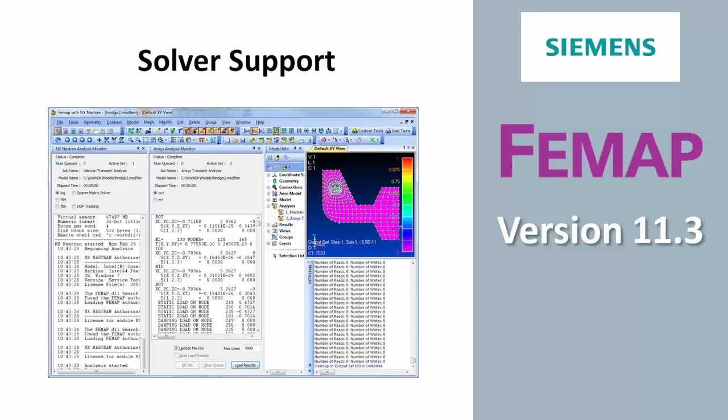For ABAQUS, we've done a lot of work over the last couple of years with high-speed attachment to results from Nastran OP2s, XDBs, comma separated, and our own binary results file. But now we also do the ABAQUS ODB file. And we're using the toolkit provided by ABAQUS, which is actually pretty nice. First of all, it worked. It was easy to incorporate, but it also does kind of automatic versioning.

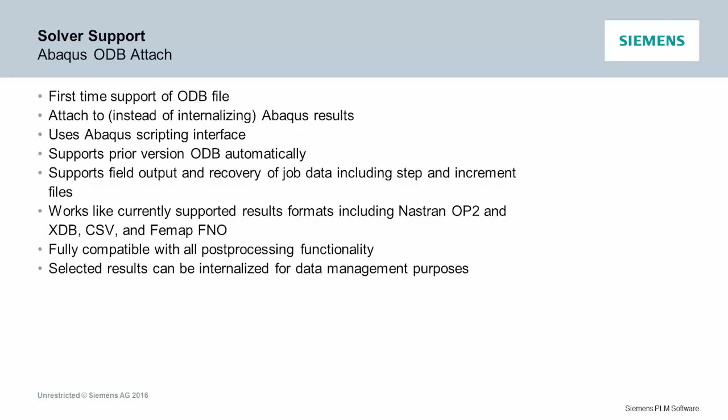If you've got an old ABAQUS ODB file, their tool, when you go to attach and use their libraries to access it, automatically knows what version it is. It gives you back the right results. So just like using OP2s, XDBs, and attaching, you now just pick an ABAQUS ODB file and we attach to it, pull everything out of there when it's needed, and then if you want to internalize it, same tool. You can say bring it in the FEMAP database permanently if you want to.

Nastran, obviously, with Siemens and NX Nastran and all that, and even a lot of our customers still run MSC Nastran. People's processes are kind of built around Nastran and how they do it. So a customer came to us, and we have these studies now. If you read in your modal run or a transient run, everything goes inside of one study. That study used to get just a title, or just say modal or static study, or transient. It now can optionally get the file name that you read the results from. So if you're naming your file something that means something, you're going to see it as your study title, which is nice.

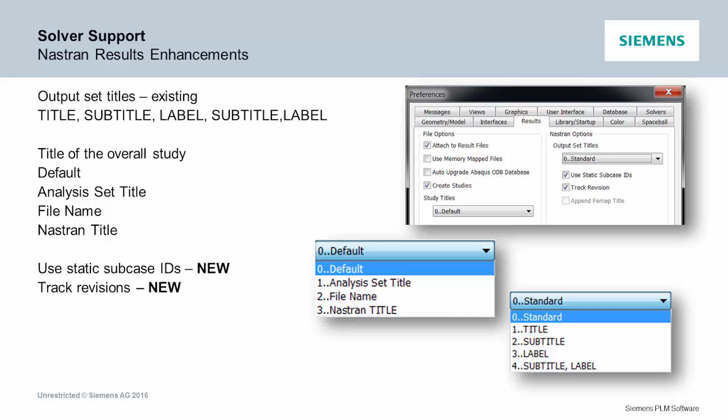We also had a customer whose subcase IDs in Nastran obviously meant something to them. Like case 301 was a 4G pull-up, and they want to know that it's 301. So FEMAP will now bring in that subcase ID and put it in as part of the title. So now you'll see case 301. You know where it came from. You know what it was. And there's also versioning, so if you read it in a second time, we will show you an R1 and R2 and R3 as you read them in, so you know what's going on.

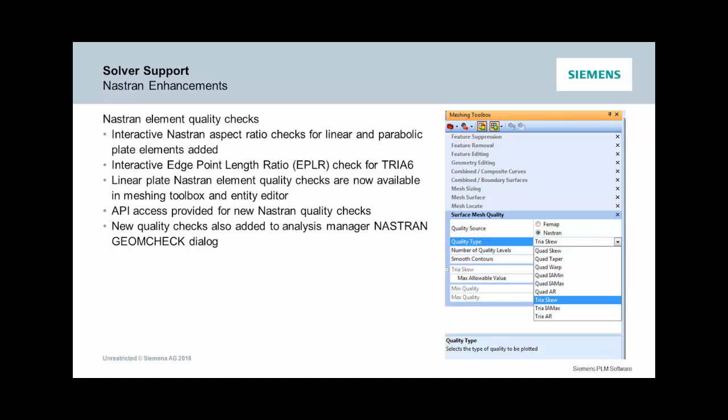Another thing here, for Nastran enhancements, we now handle, I think, all the quality checks that Nastran can do. We got the source code from the NX Nastran team, and we do the exact same quality checks. So if you want to match what gets spit out of Nastran, you can do that in FEMAP where you visualize it by a contour or criteria, or in our listings and data checking. You can use all the exact same Nastran element quality checks that Nastran uses.

Another small enhancement for our dynamics folks using Nastran, we now support all the FREQ cards. So FREQ, FREQ1, FREQ2, FREQ3, 4, and 5. And the real nice thing is they're actually across your model. So if you set up these frequency specifications and you create an analysis set, they all have checkboxes, and if you create another one, you can use the same ones in another analysis. And you can copy in between models if you set up a bunch of frequencies important to you. So if you're a frequency response or dynamics guy in Nastran, you should really appreciate using these.

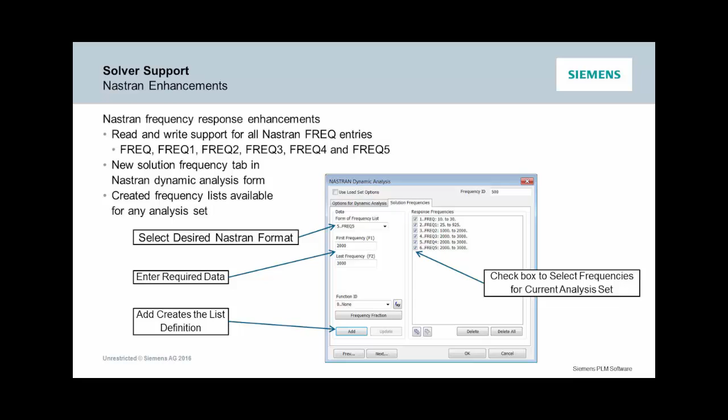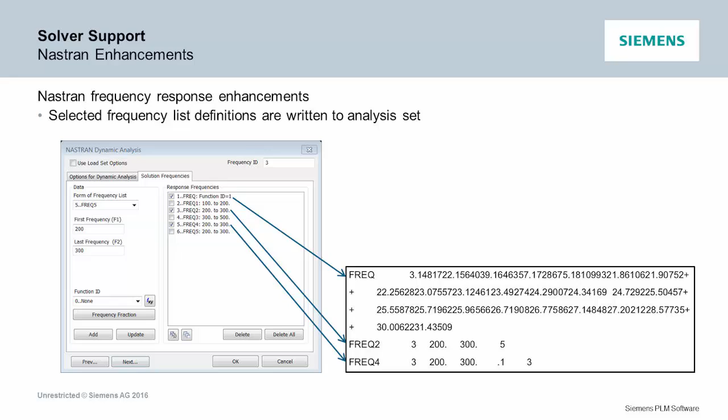Just to give an example, if you pick certain ones in the analysis setup, those are the ones that go out. And we read these just as well as write these, so it'll bring in all the different FREQ cards from your Nastran bulk data files.

For years, we followed the Nastran convention. If you want to do enforced displacements, you created it as a load, and then you had to go in the constraint set and actually constrain the same degree of freedom, because that's just the way Nastran worked. But we now support non-zero constraints as SPCs. So now you just need a constraint set, you can put the numbers on, and you can have enforced displacements on your model without having a load set. And again, read-write: if someone sends you an existing model that already had this in it, we read it in and support it now.

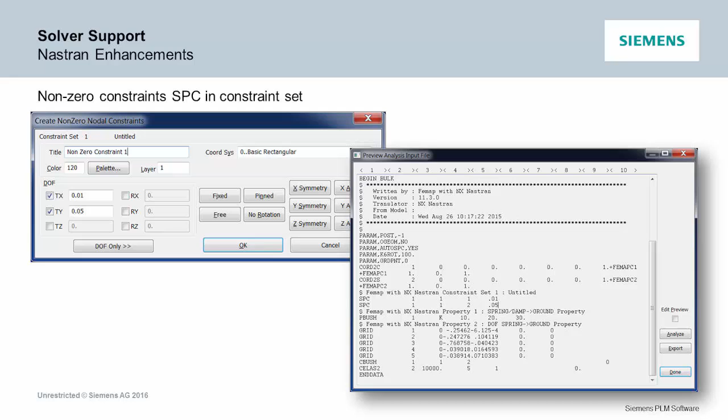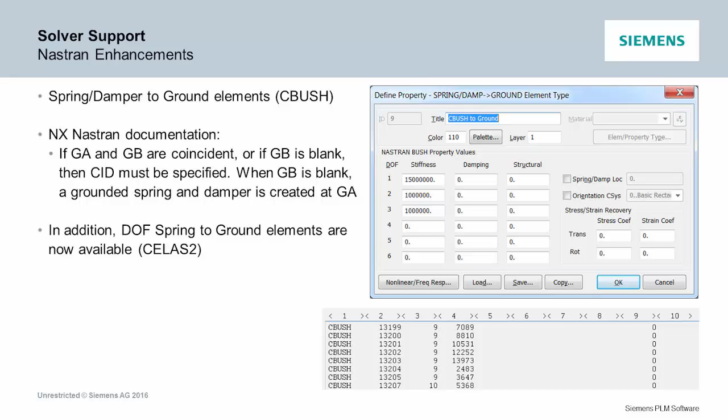Another small thing in Nastran, if a CBUSH or a CELAS has node 2 blank, that's a spring to ground. We now support that. It's actually a new element type. You go create a spring to ground element, and there's only one node you put in, but it'll automatically create that. So you don't have to go create a node, constrain it, and do all that stuff. You can just do it automatically. Read-write, all that works. So it should be useful to anyone that just wants to put some stiffness into their model in certain places. And it works with the CBUSH and the CELAS.

Again, a lot of our customers are running Nastran as well as other codes. If you have the solver available on your machine, FEMAP can actually launch and run it automatically. We took care of all that with environment variables in the past. It's getting harder and harder to even explain to people what environment variables are or where to find them in Windows to set them. So now we do it right in the GUI in FEMAP.

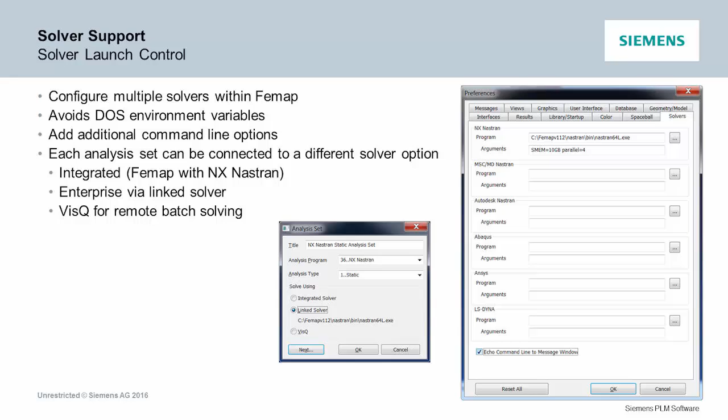You can now tell it where your Ansys solver is, where your Autodesk Nastran or DYNA is. You tell it where it is, and you have additional command line arguments if you need to feed something in for memory or whatever you do. So then when you hit Analyze in FEMAP, it'll go out, find that solver, launch it, and run your job.

Some other small Nastran things. Within each job or analysis set you set up in FEMAP, we actually added another command line here. We have people that want to run a different command line for every job they run, depending on how big the model is and how much memory it might need or other options. So you can now do that by job in FEMAP. It'll get sent over to Nastran when it runs.

And we added some more options on the GPU computing. We found that the GPU computing accelerates certain parts of the solution sequence in Nastran, and I think it actually decelerates other parts. So with this, you control which parts you want the GPU to work on.

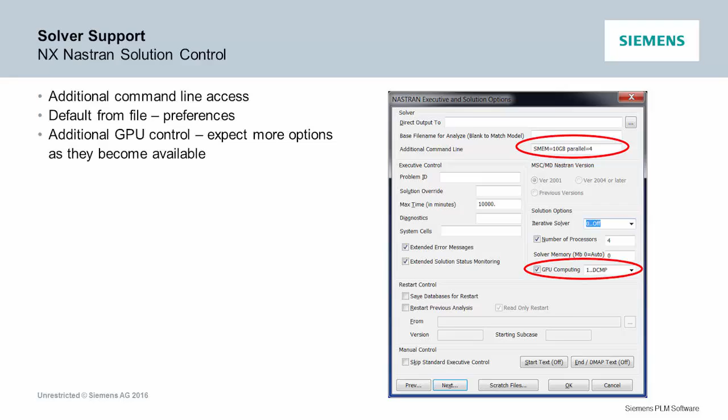We've added some DYNA stuff. Again, this is kind of launch control, setting up the jobs and getting them running, and then we continue to add material property support. We've also added a user-defined material for DYNA where you can set up any DYNA material. You just tell it what the keywords are and what values you want. So now you can actually handle any DYNA material. You can kind of code it up yourself.

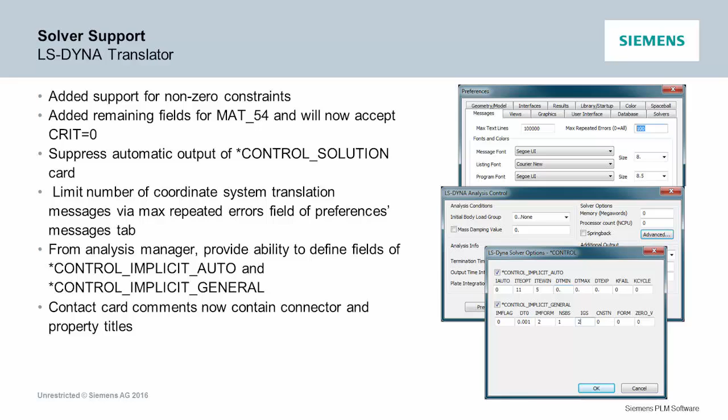We hired a gentleman who's been an Ansys developer for a long time, and the first thing we did was let him loose on our Ansys interface, which kind of made sense. His mind's a little more Ansys-centric, we're a little more Nastran-centric, so he went and cleaned up a lot of stuff in the interface. Same thing, he took care of the job control stuff to make it more modern and do all the right Ansys things.

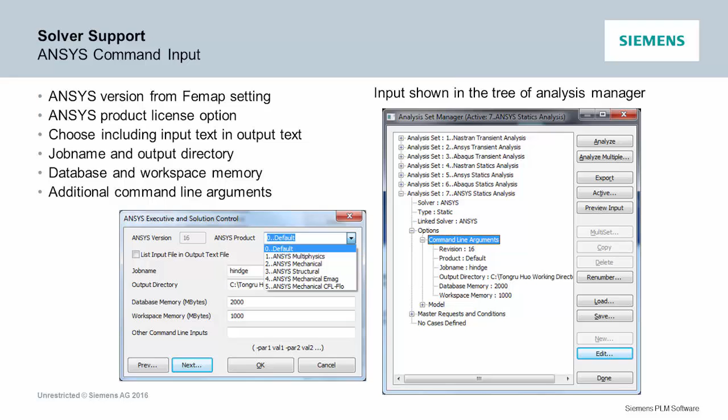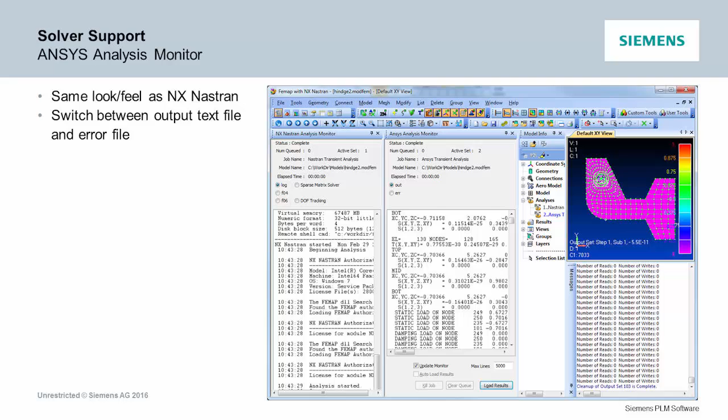And the other thing we had him do: if you're running your Ansys job on your own local machine, while it's running the Ansys solver, you get the same feedback, it monitors the job, and you see it processed just like we do for Nastran. And he also was looking at element support.

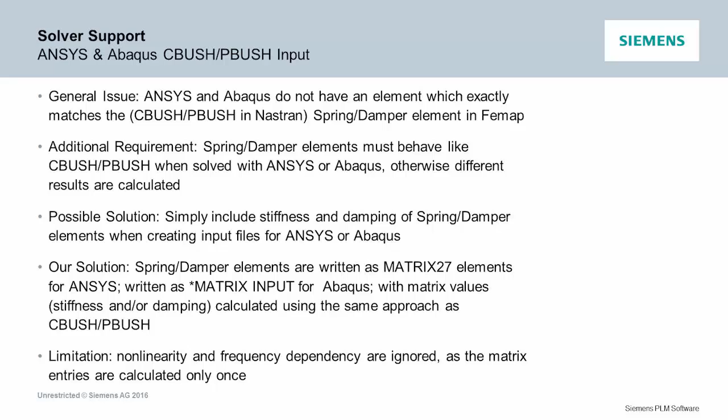The CBUSH element's really important to a lot of our customers for modeling fasteners and all types of things. Ansys doesn't have one, but he looked at the formulation for the CBUSH and writes it out as a MATRIX27 to Ansys. So now you could take your Nastran model and run it in Ansys and get the exact same answers if it's got CBUSHs in it.

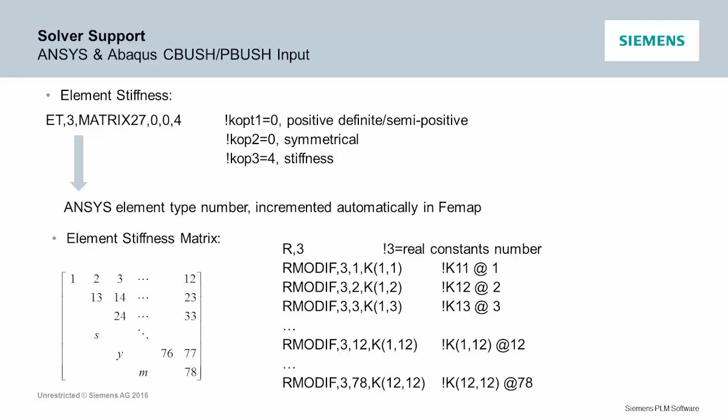And he did that by grabbing the stiffness data, the damping data, and filling in all the details here in the stiffness matrix. And you don't have to worry about it. It does it all for you automatically. You can now take your Nastran models and make exact Ansys models with CBUSHs in them.

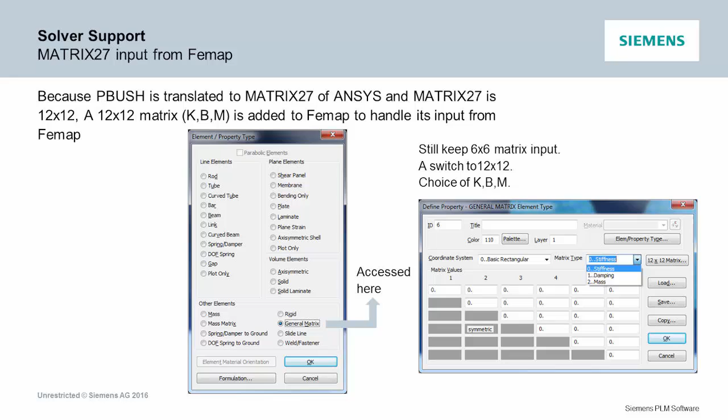And while he was in there messing with the stiffness matrices, we had a stiffness matrix element in FEMAP for a general element. He went and updated that to match, so you could put the big full MATRIX27s into FEMAP and maintain them and keep them if you want to do it that way.

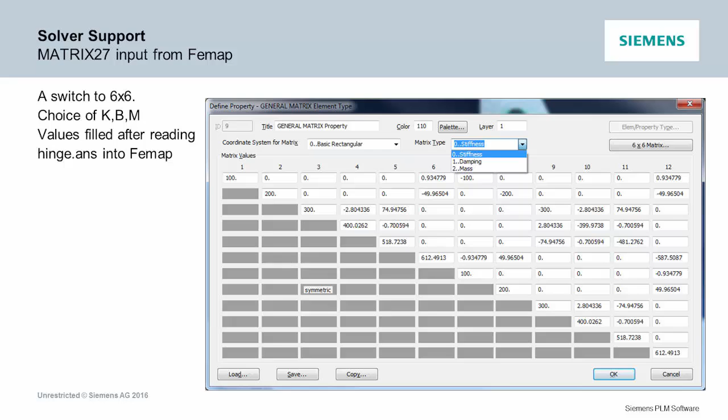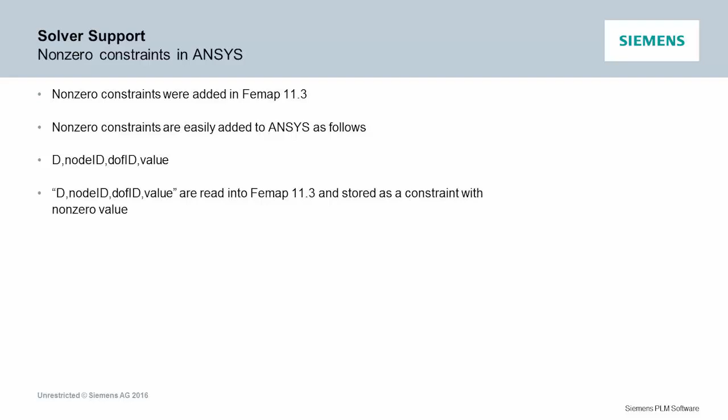Same thing that we did with the non-zero constraints in Nastran with the SPC, he did that also for Ansys and ABAQUS. So if those exist in your model, they'll get written out correctly so that they'll run the same in Ansys or ABAQUS. And he also did the CELAS. I already told you about the CELAS and the CBUSH to ground. All those are taken care of.